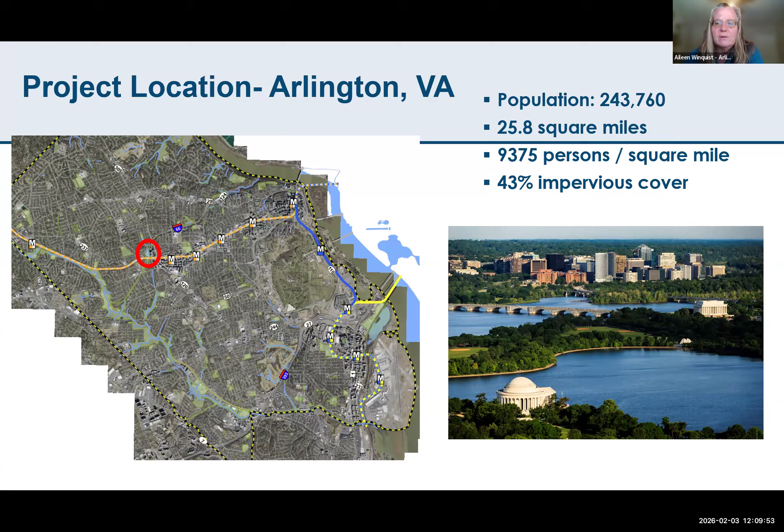So that's one thing we deal with in our stormwater program today, trying to modify and update, as we talked about with the webinar, moving from some of these legacy uses to more modern stormwater design. And again, we do have about 43% impervious development in Arlington. So just to give you that background.

The Ballston Wetland pond was initially built as a dry pond. You can see the location here, when Highway 66 was built in 1980. It has been modified over the years, but it was never really designed for stormwater treatment, it was really designed mainly for stormwater detention at that time. It's in the Lubber Run, and you can see the blue border shows the Lubber Run watershed. It drains about 450 acres from the Lubber Run watershed, and the stream flows through the east side of the pond there, as you can see.

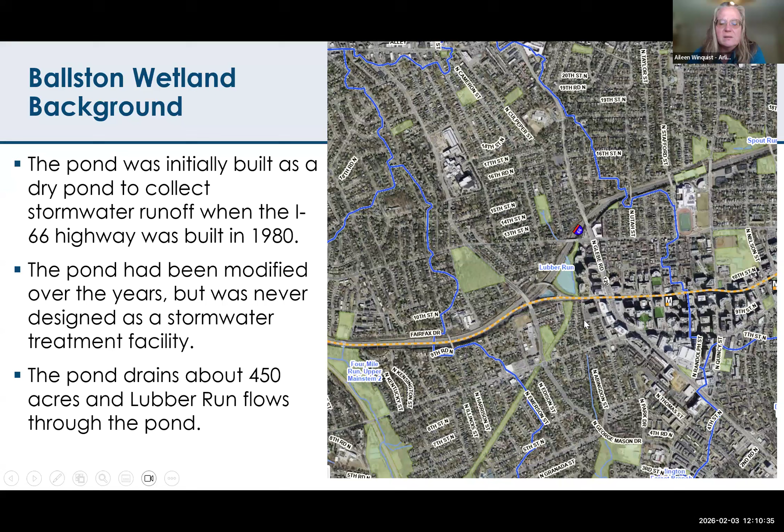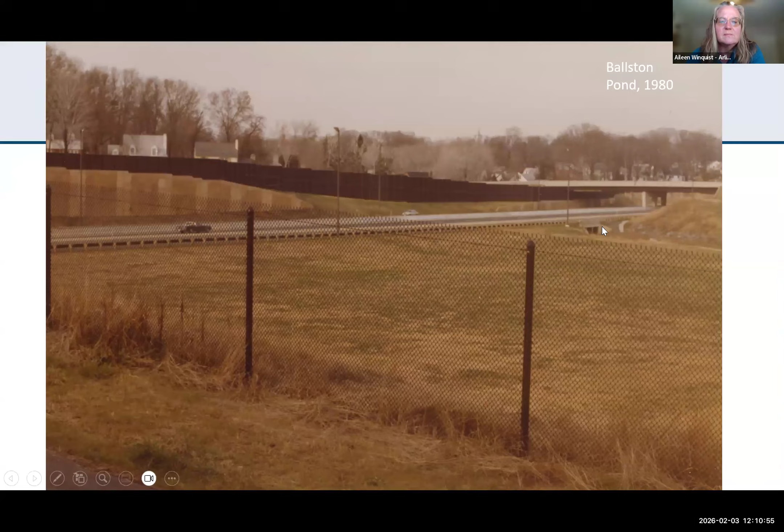And luckily, we had a resident who loved taking pictures all around the county, so we do have some historical photos of the pond at the time. You can see the original design of the detention pond here, and you can see the culvert and where Lubber Run flows through on the east side of the pond there in '66 when it was first built.

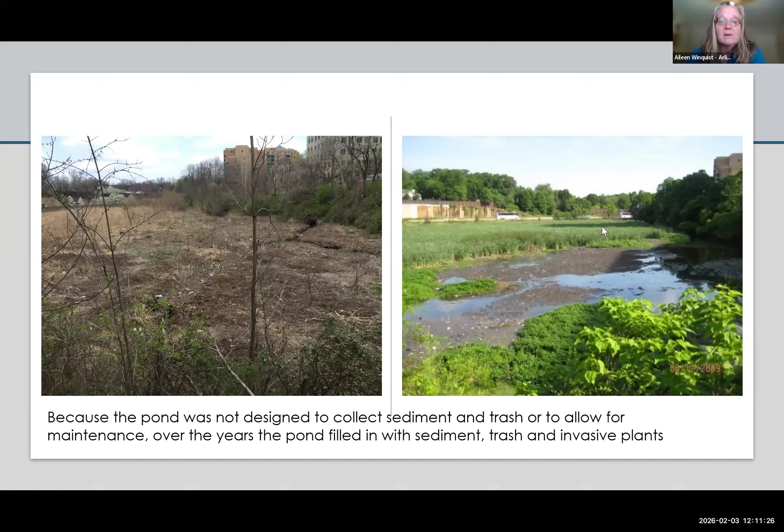But as we noted, the pond was not really designed for stormwater treatment, so there was no way to collect sediment or trash or to allow for easy maintenance of the pond. Over the years it filled in with a lot of sediment and litter, and invasive plants took over. It was a challenge for the county to manage because there weren't easy ways, like with the new design, to take care of that maintenance.

So this did offer the largest opportunity for stormwater treatment in Arlington. Again, because of our extensive development, the county is very heavily built out, so there are not many larger spaces like this where we can put in a larger stormwater facility.

We did some of the design and public process around 2011, 2012, and then there were some delays in moving to construction because of easement negotiations and some other projects we were working on as well. There were also multiple funding streams, and Christin will talk a bit more about the funding later in the presentation.

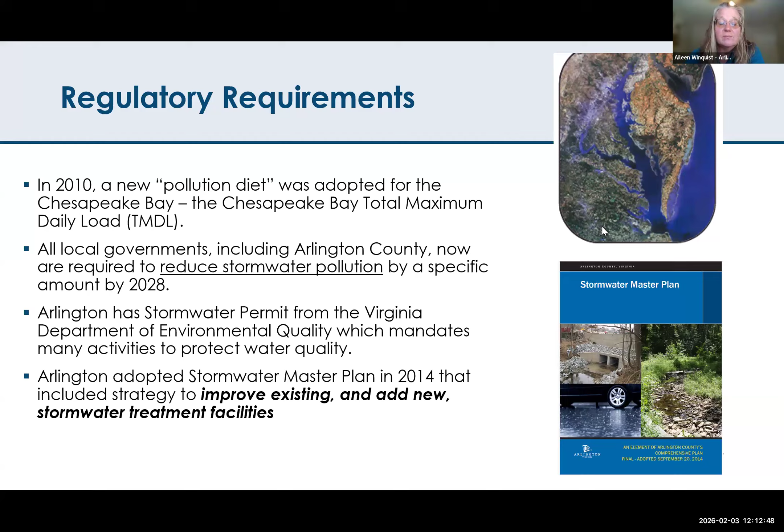Again, this was a key project for our regulatory goals with the Chesapeake Bay TMDL being passed in 2010, and then the county had new stormwater management targets included in our stormwater permit to reduce specific targets for stormwater pollution reduction in our permit from DEQ. We also adopted a stormwater master plan in 2014, which included a strategy to look at all of our existing facilities, improve those, and add new stormwater treatment facilities.

So just a note on the engagement: there was a pretty extensive engagement process for this project. We did have an advisory committee put together for this, which included 4 civic associations adjacent to the pond. We had representatives from the civic associations, also some environmental groups and county commissions, and that advisory group met multiple times, in addition to having broader public meetings.

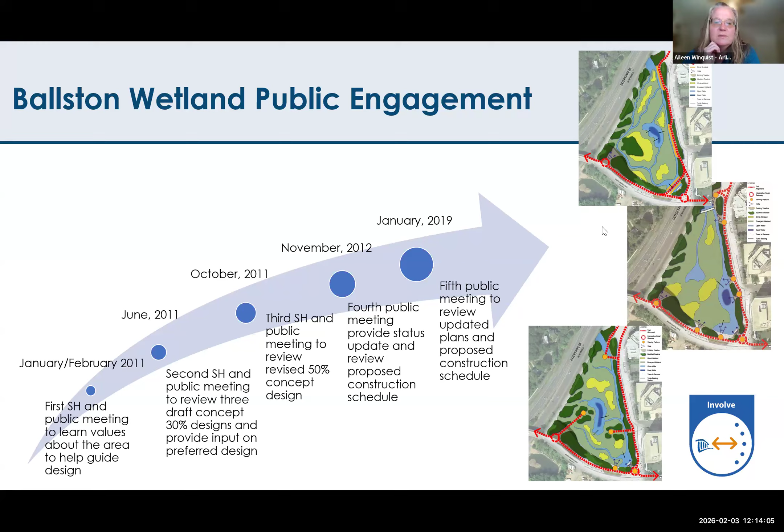The one on top was eventually chosen as the preferred design. Some of the key findings from the public process were that the community really valued this sort of natural area, even in its prior condition with the challenges of trash and sediment. But it's in a very urban node in Arlington near the Ballston Metro, so they really valued that natural space in that location.

People were concerned about trash and litter, so that was something we wanted to address with the design, trying to add more management for that. The community also wanted to choose a design that provided the maximum water quality benefits, which was the option with the longer flow path and more extensive flow areas.

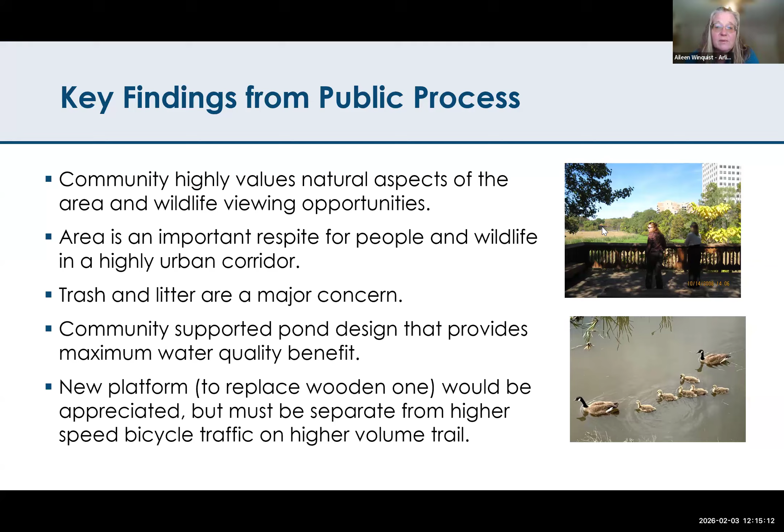There was an existing wooden platform on the south side of the pond that people did appreciate, but it was suggested to move it to the east side of the pond to help separate it from a pretty heavily used bike trail, just to avoid any bicyclist and pedestrian conflicts. So as you can see here, I'm going to turn it over to Christin to talk more about the design and some of the construction details.

So while we're on this slide, I just wanted to bring back up something you probably noted from the timeline. We had an initial design of this project, and then we had to take a break because we needed easements from two commercial and one multifamily properties along the east side of the pond. That led to a significant delay.

So when we picked this project back up in 2019, there were things we looked at again and realized we might want to reconsider. So we had a little bit of redesign. I want to acknowledge RK&K, who was the designer for this project, and their assistance with that process.

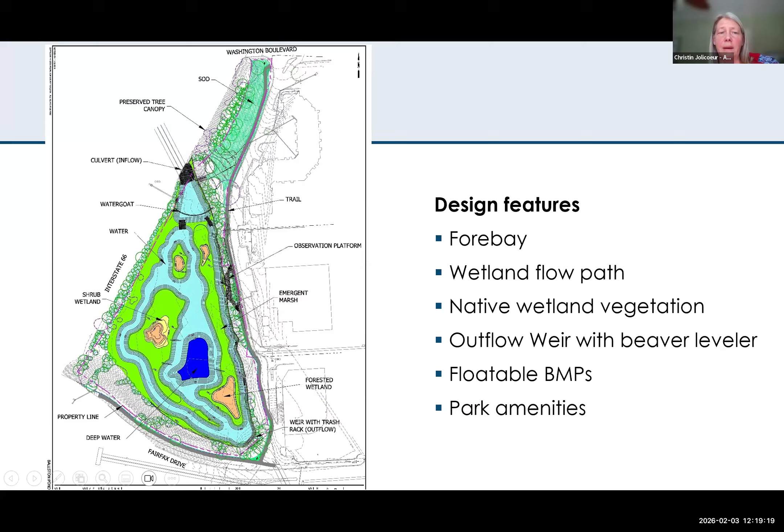So this was a major construction project. Again, want to acknowledge the contractor who undertook the construction, which was Environmental Quality Resources. They did a lot of rethinking of the construction approach on the fly, I guess I would say.

Again, because this was an online pond, managing the water flow during construction was a major issue. We had a lot of concern from our regulatory staff about big storm events and what that might mean during construction. So what EQR did was graded out the Lubber Run flow-through path first so they could stabilize that, and then did the construction of the wetland complex.

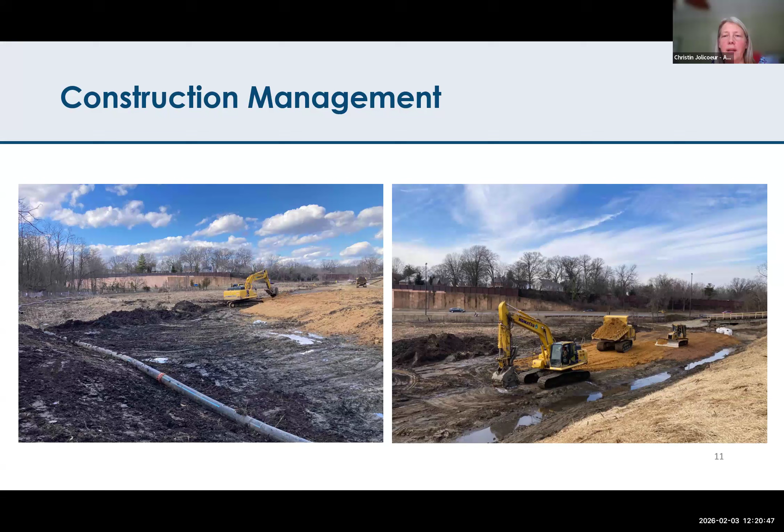These pictures show the massive earth moving operation that was required to remove all of the trash and sediment and invasive plants and debris that had accumulated over almost 40 years of neglect in this pond. It was a major operation to excavate all of that, dewater it, and then bring in some limited amounts of stable fill needed to create the grading.

Next slide. So this is what the pond looked like during construction before all the vegetation was planted, and you can see the wetland flow paths as they're being constructed.

And on the right are the two overflow weirs. As I mentioned, one of them was set to the primary elevation to allow water to flow into the wetland complex, and then there was another flow path to allow flow into Lubber Run.

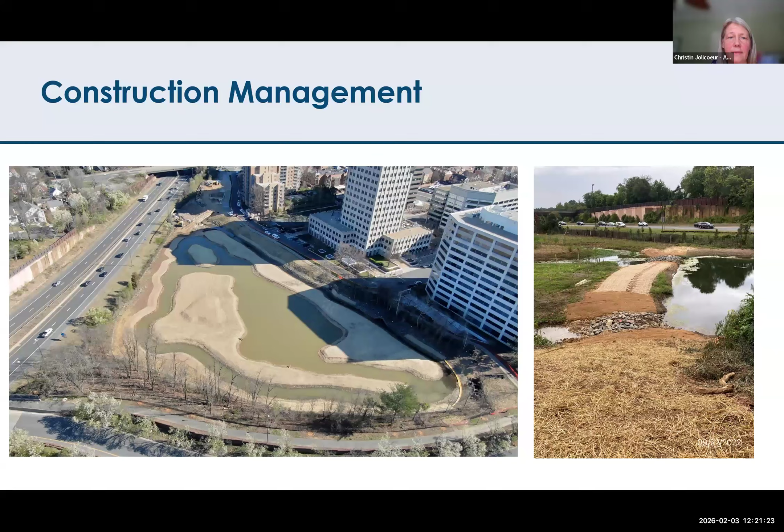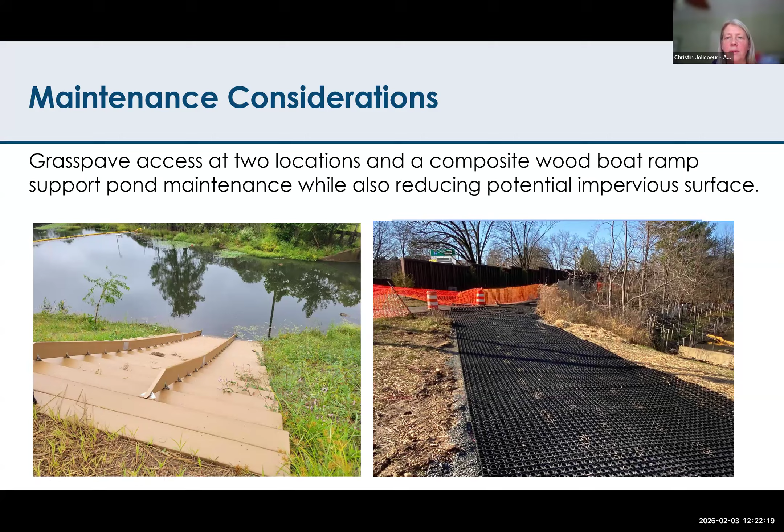Maintenance considerations were among our primary considerations for this. We wanted to avoid the situation that had led to the need for this facility to be rebuilt in part. So being able to get into the forebay and clean out any sediment was one of the key components. We created a composite wood boat ramp that allowed getting in not only to clean out the forebay, but also for boats to do vegetation management on the islands, collect trash, and maintain the water goat. We also created Grasspave access areas, one leading to the boat ramp and another on the south side of the pond, allowing access to the outlet weir for maintenance.

I mentioned wildlife habitat, which was a major focus of the community. As a result, we used some trees from on site to create turtle basking logs, and we've noticed that those are getting a lot of use.

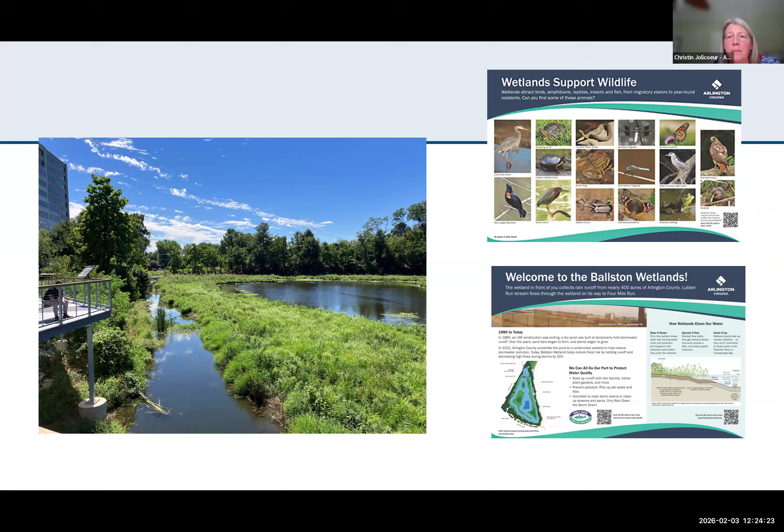This is a picture of the observation platform that was installed. You can see it actually extends out over the constructed wetland. We installed informational signs on the railing, 3 total, talking about the water quality benefits of the project and the wildlife supported by the wetland.

So what were the overall water quality benefits? Well, I mentioned the trash rack and the water goat, both floatables best management practices, which contributed to our MS4 compliance. This was also our single largest water quality treatment facility in Arlington. About 230 impervious acres were treated, with significant nutrient and sediment removal. All in all, this project contributed about 10% of the county's overall Chesapeake Bay cleanup target, a huge component of our target, and also decreases Lubber Run peak flows by 30%.

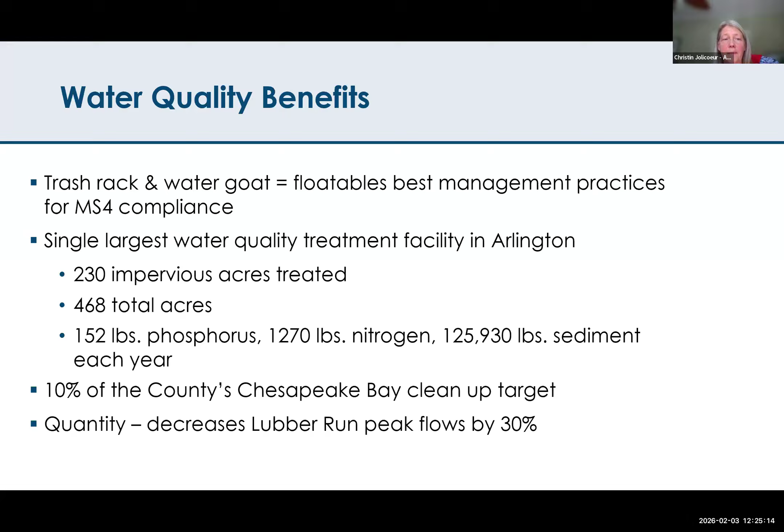In terms of funding, we had numerous funding sources. The total cost of the project was about $4.25 million for construction and close to $5 million total. Much of that was provided by our water quality or environmental quality capital program from the stormwater side, but we also had a grant from DEQ. We had stormwater local assistance funds contributing about $0.6 million. And then we had a site plan contribution from one of the site plans adjacent to the wetland, managed by our Parks Department, about $1 million.

Subsequent to construction, we're contributing about $15,000 annually towards maintenance. One key component of this project is post-construction maintenance. We created a maintenance agreement with our Parks Department and the Department of Environmental Services both contributing. We also engaged the construction contractor, EQR, for 2 years, providing a 2-year warranty for the plants, invasive control, and initial establishment watering for the trees. The county took on inspection of the wetland performance, including maintaining the water goat and cleaning out the forebay with annual inspections. After EQR finishes their work, we'll take on invasive control for another 3 years before handing it over to our Parks Department.

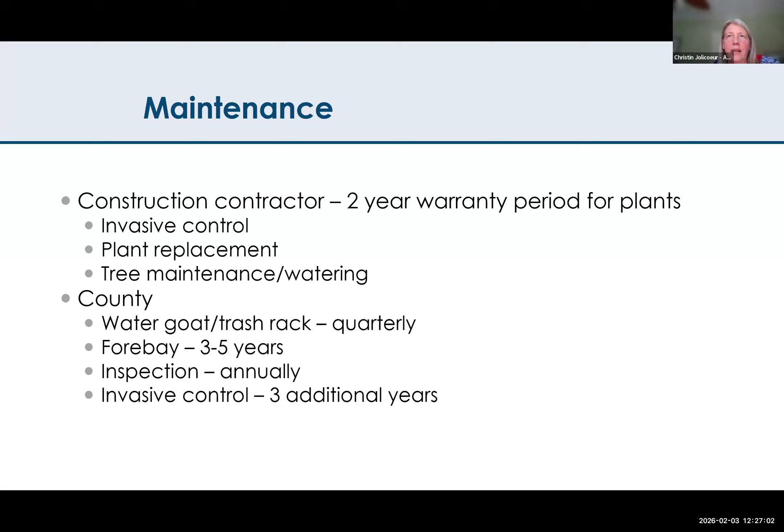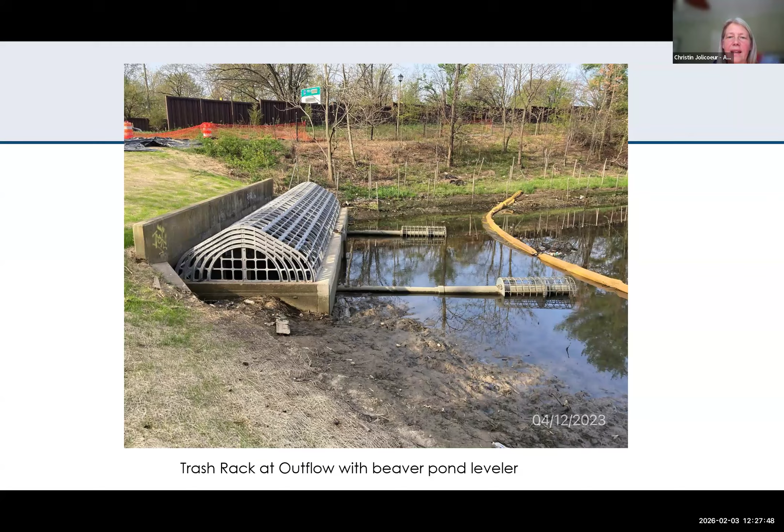We wanted to mention and show a picture of the trash rack at the outflow. I didn't mention the beaver baffles. One reason the pond had filled with sediment is that beavers came in and were blocking outflow, so it was important not to attract beavers to the outflow facility. We included beaver baffles that prevented the sound of flowing water and kept them from taking up residence or clogging the pipes. What we decided to use was an HDPE trash rack, and I think we have another slide showing what happened to it during one subsequent storm. What we didn't take into account was the sheer weight of invasive aquatic plants that invaded the pond, which we've since gotten a better hold on. The water primrose was pretty thick for a while, and at the time of this storm, the plant debris piled up against the trash rack and it imploded, which was a lesson learned.

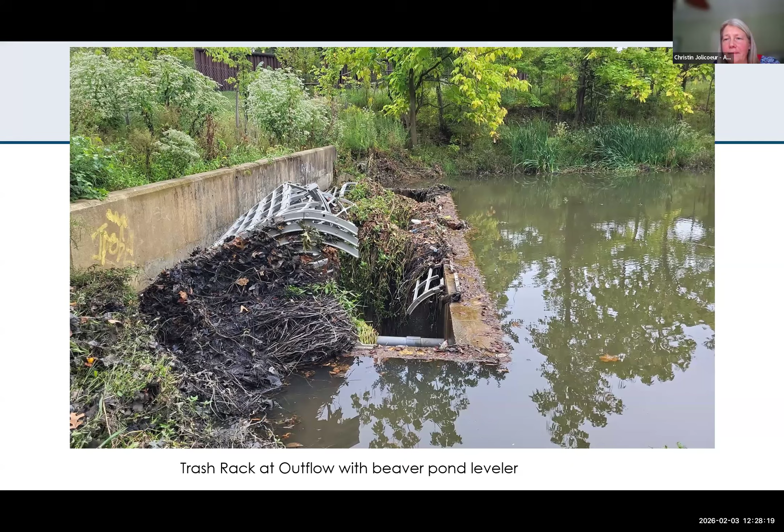And this is just another picture of the pond. This is about a year after construction.

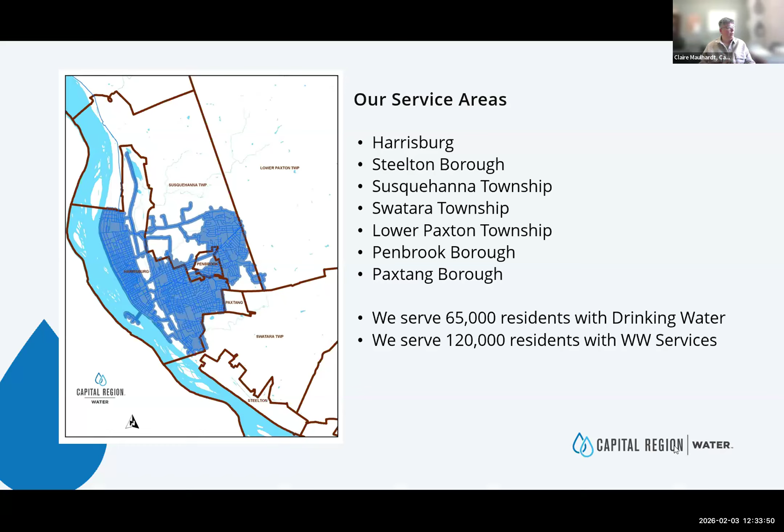The immediate timeline for this project started back in 2017, but prior to that, there was broader engagement across all of the city of Harrisburg through this community greening plan process, and this is one of many projects identified in that effort.

Talking with the community group in this particular neighborhood, which is the Bellevue Park historic neighborhood, really is a unique component within the broader urban landscape of Harrisburg. Much of the rest of Harrisburg, aside from this neighborhood, is tight row homes, smaller blocks, smaller lot sizes, and dense capital downtown.

Surrounding this entire very green neighborhood, it turns into single family homes with quite large lots. You kind of drop into it, and it's almost a little bit magical, like, wait, I was just in what I thought was a city, and now I'm in this beautiful little neighborhood. So it's really one of a kind in terms of strategy toward our regulatory needs.

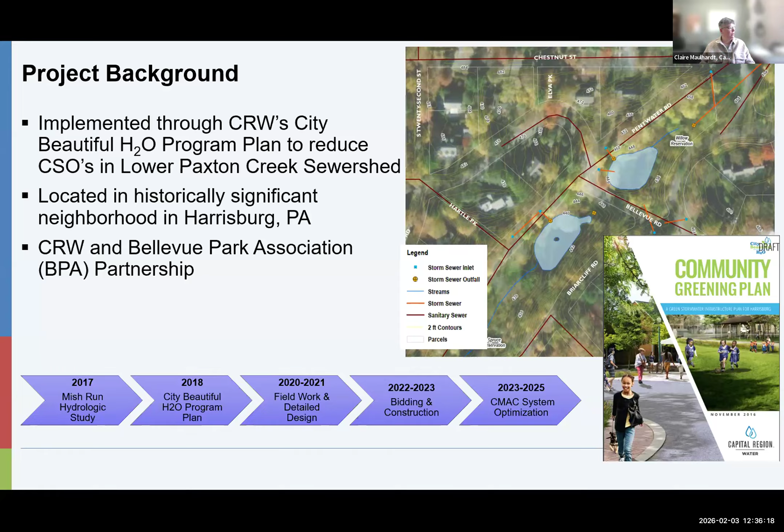The historic context here is very unique. This was the first planned residential community, established in 1910, designed by the renowned landscape architect Warren Manning. It has over 12 acres of open space called reservations, and these ponds were designed features—they weren't just existing. They were design features built into what was originally just an intermittent stream, Mish Run, that ran up through this part of the city.

We looked to talk with this neighborhood, which is very attached to the historic presence of this place. They wear it like a badge of honor, and many of the residents are older and have a lot of ownership over the historic components of the space and what it means in the broader context of planning in the United States.

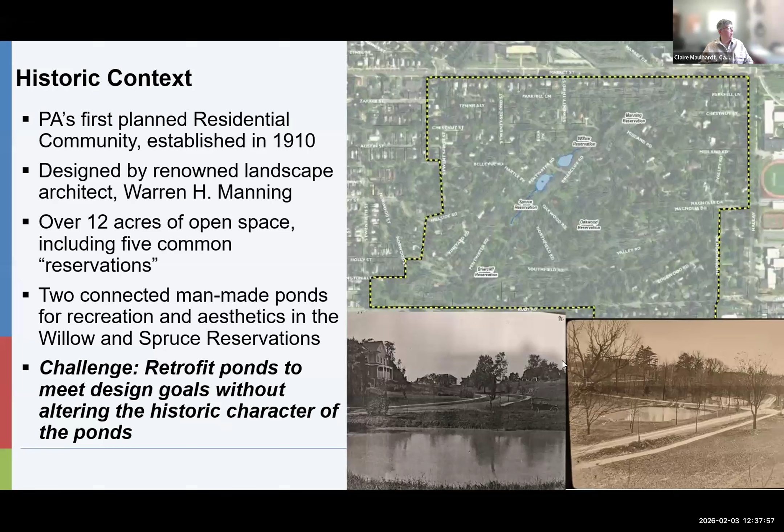So we came in here with this unique challenge of retrofitting ponds to meet design goals without losing or altering the historic character of both the ponds and the landscape around them. But it wasn't in great shape when we got here—existing conditions were challenging. A lot had changed upstream of these ponds that had led to them being silted in, and there's a huge 42-inch storm pipe flowing into these ponds.

Originally there wasn't a lot of stormwater directed through these ponds. Then they were kind of commandeered by recent development in the last 20 years, designated as stormwater features for that upstream impervious area, without really doing anything to improve the ponds themselves. Because of that, there's a lot of erosion and sediment issues, so there was water ponded, but without a whole lot of life in it—some carp and other wildlife, but mostly just what was dumped in there, creatures that could survive in zero-oxygen water and fish that could bury themselves in the mud and live for years.

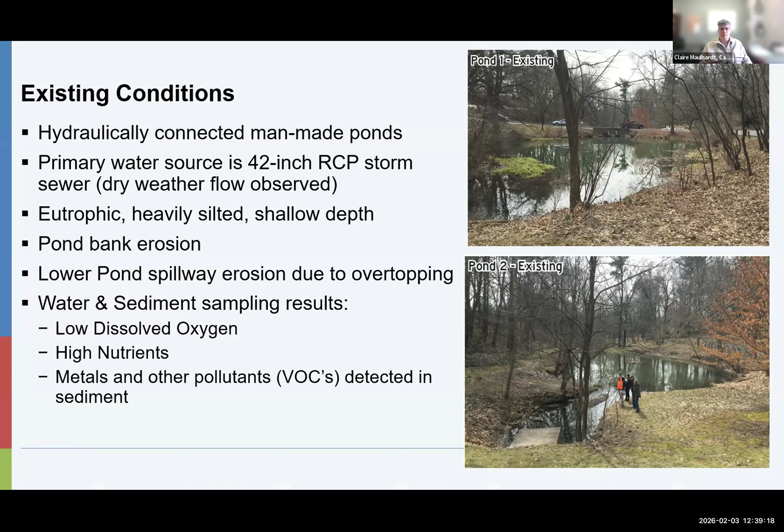We came in with this goal, and the neighborhood had the same goal—they had been approaching us saying these ponds need a major overhaul. And it's like, okay, that's great, but we also need to make them function for stormwater and help with our downstream issues. So we wanted to help address the water quality of the ponds, optimize them for stormwater management, improve the habitat and ecological function, all while balancing landscape aesthetics and function.

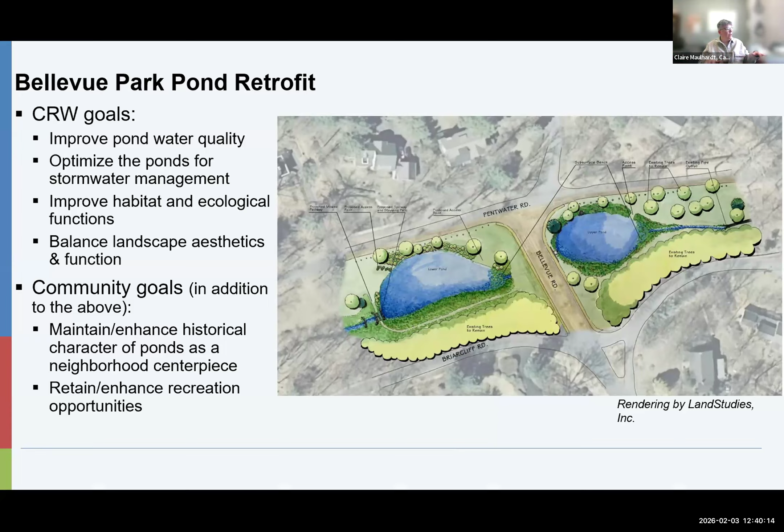The community had similar goals, but wanted to maintain the historic character of the ponds as a centerpiece to the neighborhood, and retain and enhance the recreational opportunities. They have trails around this space, and it's kind of in the valley of the neighborhood, so people are constantly walking around and enjoying this green space.

So in the broader context, we have about 55 acres of drainage, focusing down into the drainage through the ponds. These were just a snapshot of the characteristic of the existing condition and what we were looking to manage, and what our goals were for volume control.

The goal was to maximize these ponds for stormwater management. It's about 16 acres of impervious surface, total of 55 acres draining into the ponds. The goal was ultimately to be able to manage the first inch of runoff from the impervious surfaces.

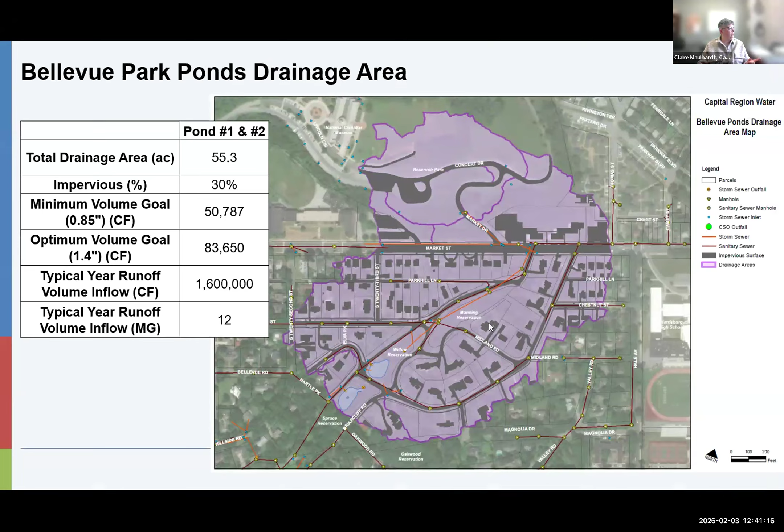I'll jump back down to talk a little bit about the community process as well. It was really this unique situation where we were trying to balance the beauty and historic character of these ponds with the resiliency that we wanted to place into it.

At first, we brought a lot of different concepts to the community, and what happened there became a little bit of tension that actually wasn't between Capital Region Water and the neighborhood association. It was between two philosophies within the neighborhood themselves, groups of people who on one hand had a design that was very 'let's just turn these whole things into wetlands,' and then there's the other group, a more historically focused group, who said no, we need to have this open water. It's a historic landscape feature, very critical to preserving the character. So we were sort of the mediators, and had to navigate that and find a blend of those two different concepts.

So it was leave more open water and have on the edges some wetland-like features. And then how are we going to maximize volume control? Well, what we'll lead into is let's use technology to help us do that.

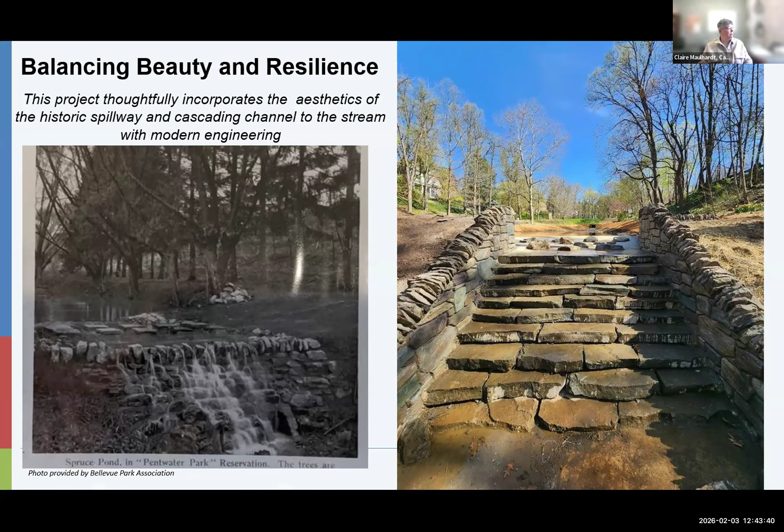So with that, I'll let Susan jump into more of the technology side of it and how we made it all work. Thanks, Claire.

We had a challenge in trying to maximize the stormwater performance in ponds that, as Claire mentioned, were never designed for stormwater - they're landscape ponds. We had limited space to grade out and provide more storage area to manage the stormwater in a passive way. We also had to maintain free water surface flow, so a standard passive engineered outlet design really wasn't going to work here.

So we looked to using a CMAC system. For those who aren't familiar, CMAC stands for Continuous Monitoring and Adaptive Controls. Essentially what it does is use a cellular connection to obtain weather forecasts, and then it uses smart controls in a software platform - this is actually the Opti system - to manage the water levels in the pond.

It incorporates a level sensor, so the system knows how much water is in the pond, and then it has an actuated valve that will automatically open and close to control the water level. Based on the weather forecast and within a predicted threshold, the ponds can drain during dry weather to provide additional storage for runoff that is expected in that forecast. This system is also equipped with solar panels for power.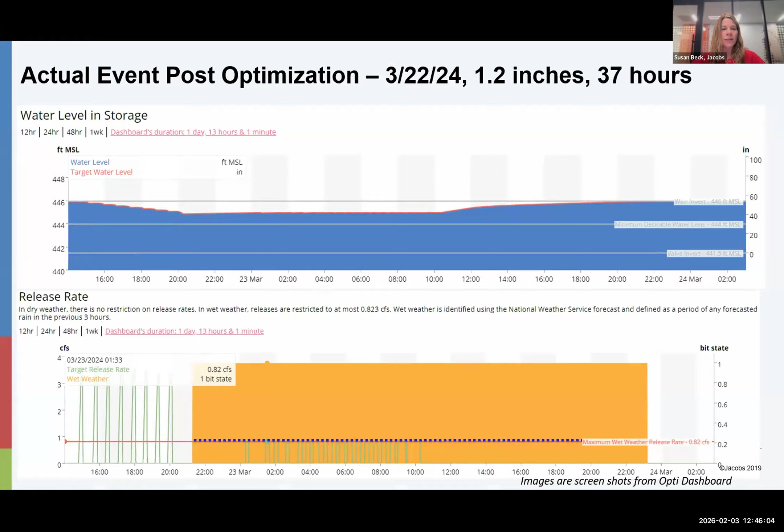What you see in the green box on the left is the water level on the top area. You see the dry weather drawdown, then the release rate, the flow rate, and on the bottom bar, you can see that it's able to release that water to provide storage within the pond.

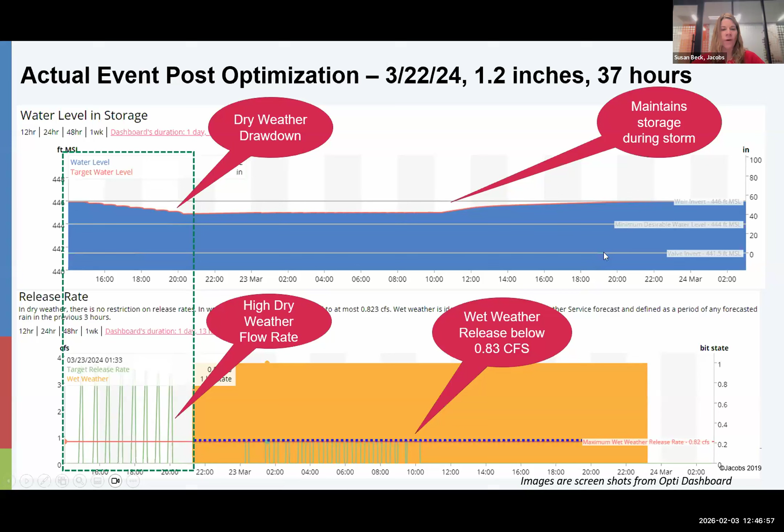During wet weather, shown in orange, as that proceeds you can see the butterfly valve releasing, shown in green. That green line is the flow rate, and the goal was to keep the wet weather release below 0.83 cubic feet per second. You can see it's releasing a little at a time during the storm to maintain the storage volume required to manage the full volume from that storm event.

The system works for what we designed. We initially designed it based on CRW's typical year SWMM model to look at performance on an average annual basis, and it was designed to manage 1 inch of runoff, about 86% of annual rainfall events.

When we did a reevaluation in 2025 to look at performance, we found the system well exceeded the original design, managing about 98% of storms and about 2 inches of runoff on an annual basis.

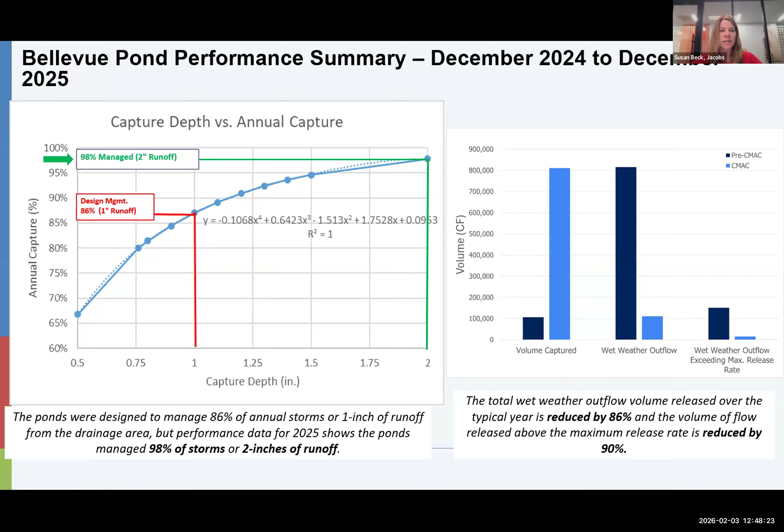In terms of volume, the system reduces total wet weather outflow by about 86%. It's able to reduce the total volume, and when it doesn't have enough storage, it releases some, but at or below the release rate. So it's managing about 90% of the total volume that flowed in 2025. That will vary year to year depending on rainfall distribution, but it's very promising performance so far.

Just something to note here, we didn't necessarily provide photographs, but similar to the other project, this was a messy job. We had to excavate a bunch of sediment that had filled in, down to an existing clay layer that had created the ponds in the first place. We had to be pretty careful with that.

As noted in the existing conditions, all those deposits had a lot of heavy metals and contaminants, so we had to landfill all of that. It was really mucky, and our contractor had to do a lot of things to get it to solidify in order to truck it off site, using inert additives, since it had to be inert.

So, lessons learned. The system ended up exceeding our stormwater requirements. The use of the CMAC really enhanced the design, and we were able to maintain and meet all of the goals for the project.

The other beauty of the CMAC system is it provides flexibility for CRW to control water storage, both for maintenance and as system changes occur, both in terms of inflows and as their needs may change in the future. They can modify how the system functions. And obviously there are so many co-benefits here in terms of recreation, enhancing green space, ecosystem services, and climate resilience.

And as Claire summarized very well, just working with any community, having as much patience and education are really key to getting community buy-in. I think we had some big resistors of this project as we were trying to get through design, and now I would say those folks are largely champions of the project and how it ended up.

There were a few historic preservation champions who initially ruffled at the project, only to become folks who lifted up this project to the Harrisburg Historic Association, and it won a Historic Preservation Award, among other awards in the engineering community. That's been a really great shining star, balancing these aspects.